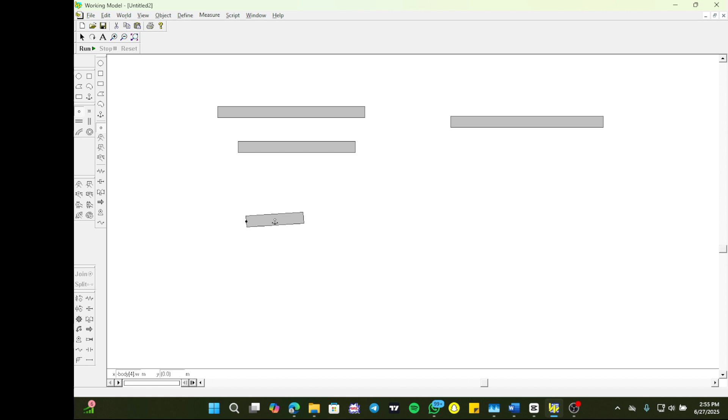Then put a ground on it to make it fixed. Place a point element here and a point element here. The point on the left will represent O4 and the point on the right will represent O2. This is our link O4B.

Now pay attention to the way I will draw them. You can use their length to differentiate between which length is for which part. So put your point here, then put your point here, and join this to the ground point.

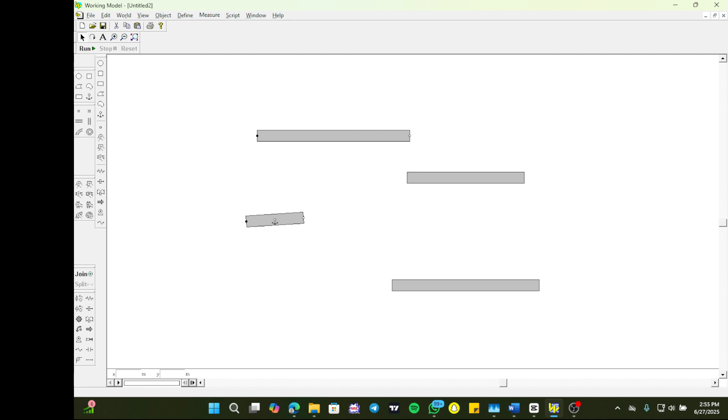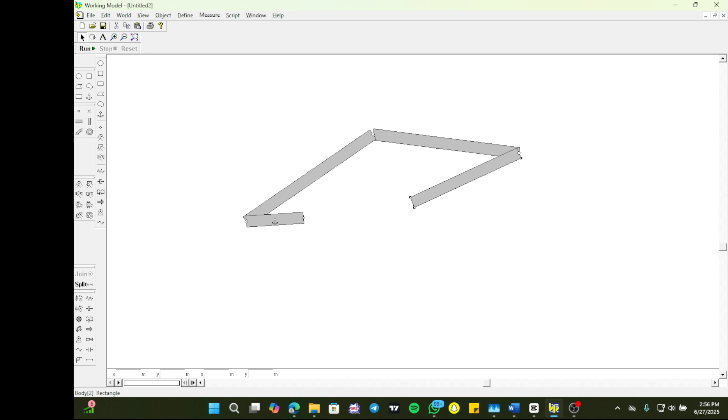Next is this piece, put your point here too, and join these two. Last, put a point here and join them as well. The final one is to join the link A to the point O2.

Join them. So this is the link in position 1. Next, we need to find the point on the output link O4B where we attach the coupler. We follow the same procedure as we did for the second assignment.

I'm measuring O4E, which is 1.7, so we cut a strip of 1.7. I'm here at 1.7. Then we put a point here, then a point here. Let's see, okay, so you rotate it.

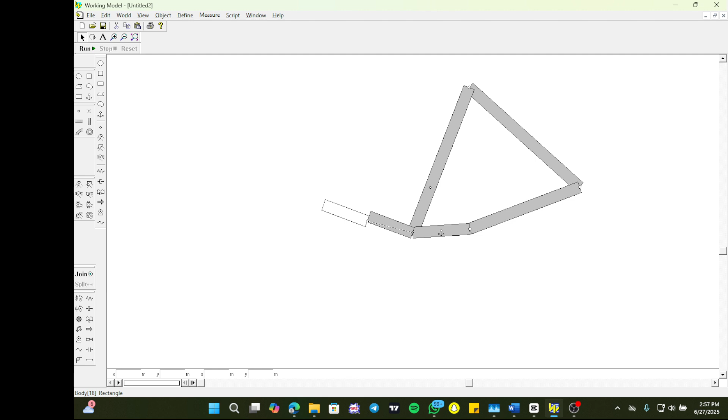Then you move the points you put at the edge to the output link, right at the tip, so you can see. Now I can split it and then remove it, and remove this one.

Now with the points here, I need the coupler, and the coupler is 9 centimeters. So cut 9, come here, 9, and then our height should be 0.4.

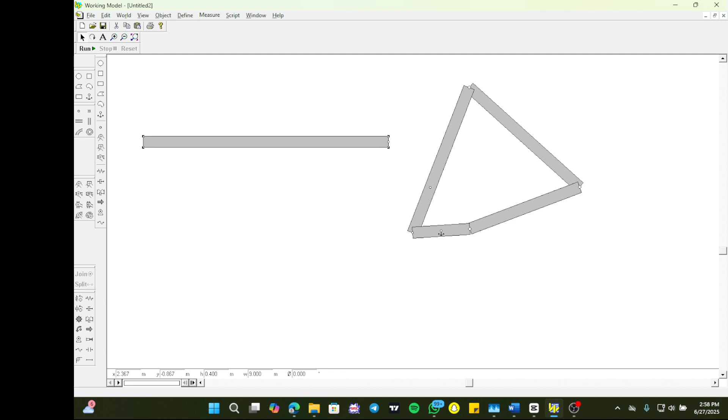So you put a point here, and then you join them as well. Now we need our ground points, O6O4. O6O4's length is 9.1 and the angle is 17 degrees. So let's cut 9.1.

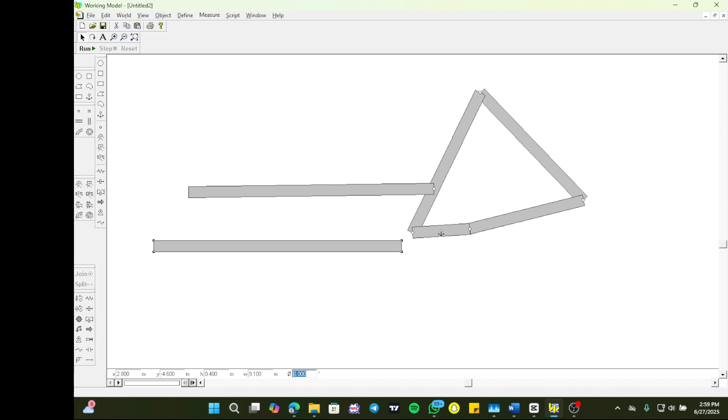The length is 9.1, and then join at 17 degrees. Let's rotate it and see, 17 degrees.

At this position you put a ground on it, and then you cut the crank. The crank is O6F, and O6F is 1.3. So you cut 1.3.

And then you bring it closer a bit. You put a point element here, a point element here, then you join. Then for the length, the height is 0.4. Then you do the same for between the crank and the coupler.

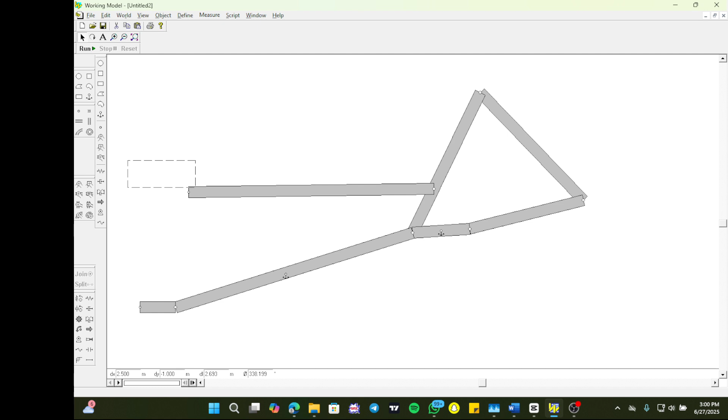All right, let's see. So at the joint between the ground link and the crank, you can put your motor there and then run. Okay, so there you go. That is the coupler output's working model form.